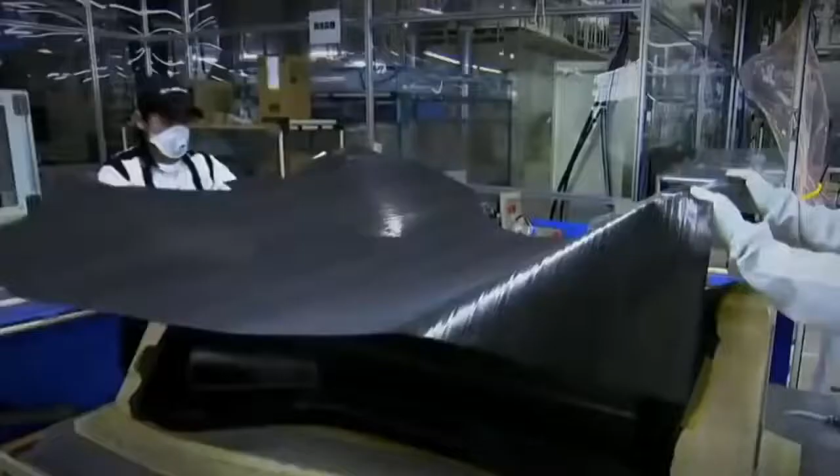A car like no other is taking shape. Craftsmen hand-build what they consider an automotive work of art. Money is no object. This machine must redefine a billion-dollar brand. Failure is not an option.

Japanese marque Lexus sells itself on luxury, marketing its cars as elegant, quiet, high-tech, and efficient. Now, a different kind of car wears the Lexus badge: the LFA. Aggressive, loud, agile, with the highest revving V10 engine in a production car, capable of 325 kilometers per hour. A car like nothing Lexus has ever produced before.

Lexus is just over 20 years old. The world's largest car maker, Toyota, created the brand to compete with other high-flying luxury marques like Mercedes-Benz, BMW, and Jaguar. It's worked. Lexus is now one of the biggest-selling high-end marques in the United States.

But now, Lexus is out to inject more excitement into their brand. Chief Engineer Tanahashi Haruhiko is the man behind this vision. The LFA has a passion, an emotion that isn't in earlier Lexus cars. We wanted to move the brand in that direction. That's how we made this car.

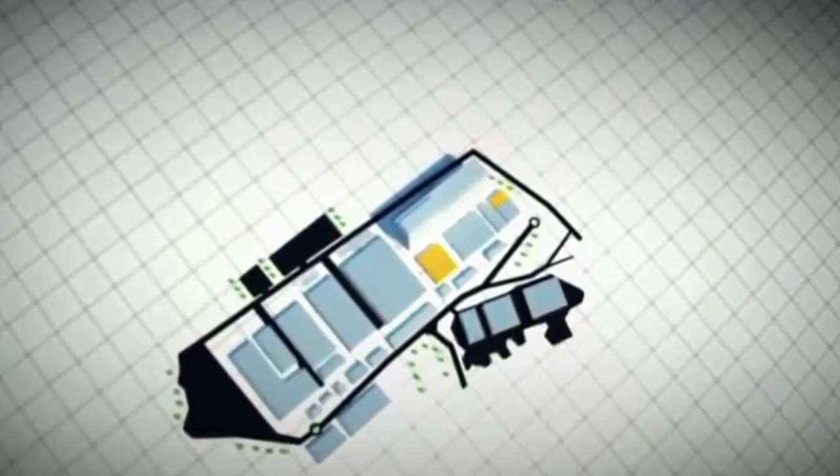Finding a factory in Japan isn't hard when you're part of the country's largest company. Toyota is so big, they even have their own city, Toyota City. Of the company's 15 Japanese factories, 10 are found in the city or close by, among them the Motomachi assembly plant. The company transformed two unassuming blocks of this megafactory to create the LFA. They then scoured Toyota's 50,000 Japanese workforce to handpick just 175.

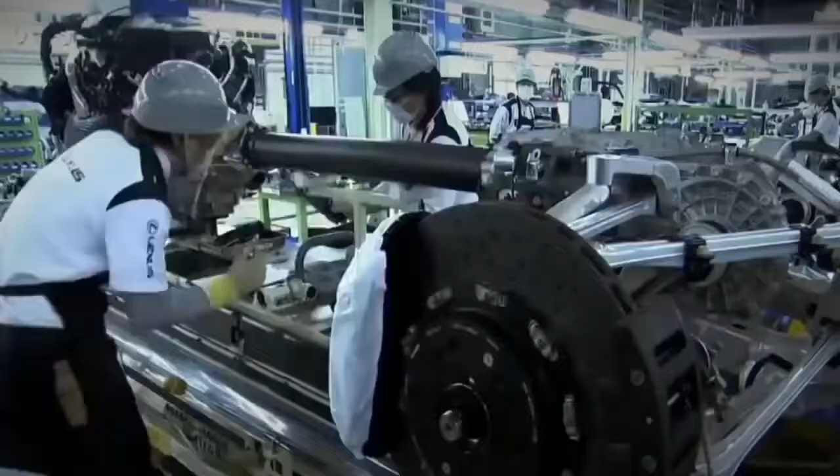All the associates here at the LFA Works feel they are artisans, not just operators. These artisans are known as takumi, Japanese for craftsmen, a status only conferred on the most highly trained, skilled workers. Each and every associate at the LFA Works is seeking to achieve perfection, taking this challenge on with a sort of samurai spirit.

Yamanaka Shigeru is manager of the LFA Works. His teamwork credentials come from another time-honored Japanese tradition: baseball. Before this, I was working as manager of the Toyota Motor Corporation baseball team, which brought people together from lots of different backgrounds. It was because I could manage that organization that I've been made manager here.

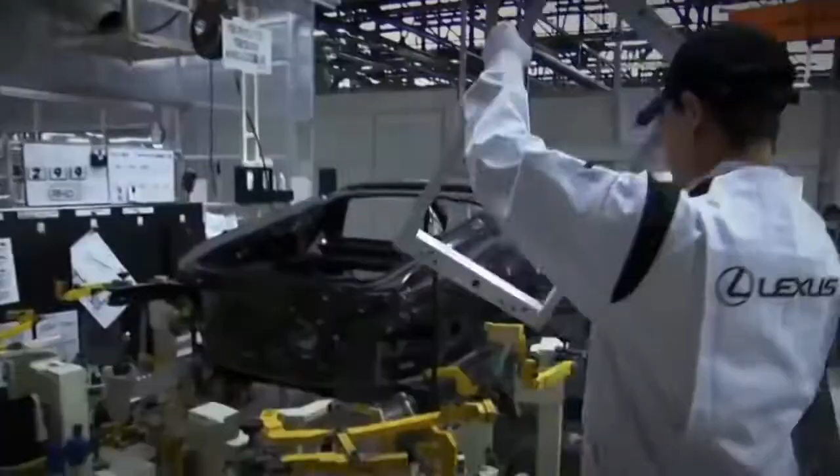To reach their goal, they're tight-knit, utilizing sophisticated tools and materials to build the car. The most important of these is carbon fiber composite. Carbon is crucial to the car's performance. It's a material 5 times the strength of steel, yet a quarter the weight. It's the construction material of choice for both Formula One racing cars and the aerospace industry.

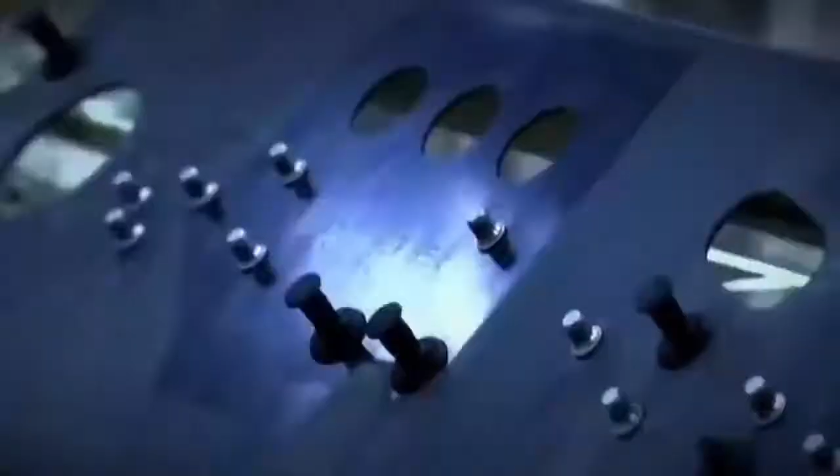The company even makes their own carbon fiber here on site. Up until now, no television cameras have ever been allowed inside this top-secret facility. First, simple strands of carbon fiber are woven into a pliable cloth using an automated weaving machine. This fabric is then transformed through heat, pressure, epoxy resin, and labor-intensive techniques into the car's core known as the tub. The tub is pieced together like a 3D jigsaw. It starts with the construction of the floor.

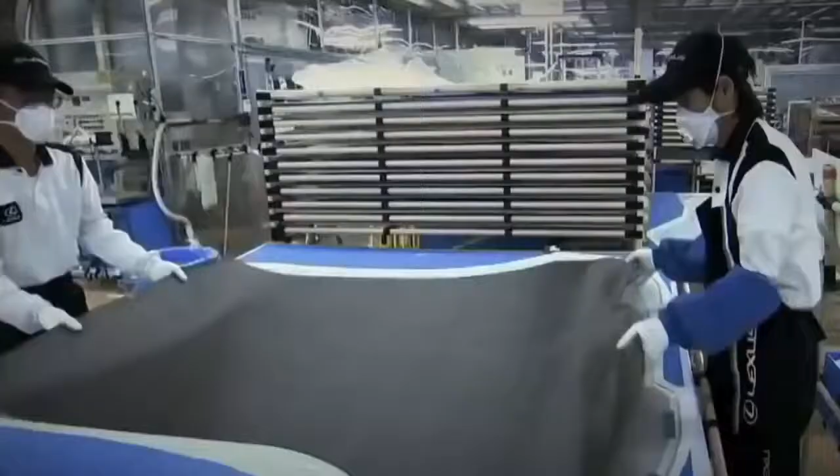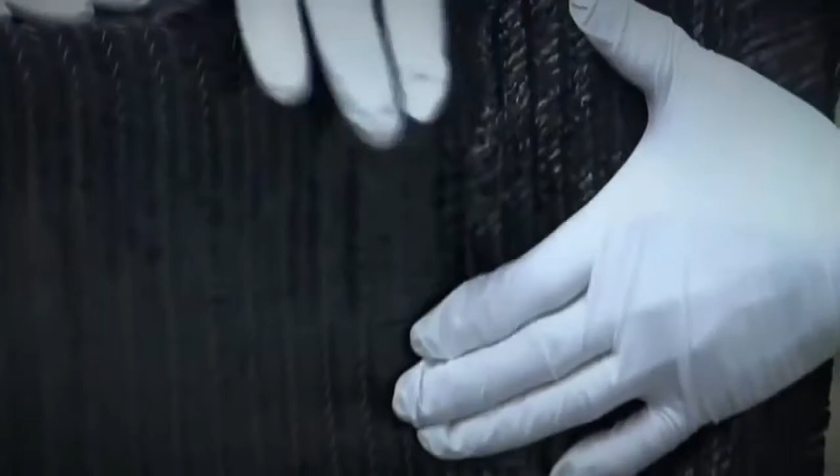To make it, precisely cut carbon fiber cloth is lifted onto a mold. Next, skilled takumi smooth the supple fabric over the mold. This one is for the transmission tunnel that will house the drive shaft and exhaust. In very complex areas like this, the fabric inevitably becomes frayed and not very neat. The associates work with these areas as if working with silk, taking great care every day. They also wear masks to avoid breathing in the hazardous fibers. In the beginning, the associates found it very difficult to work this material. It was much easier when they used an iron.

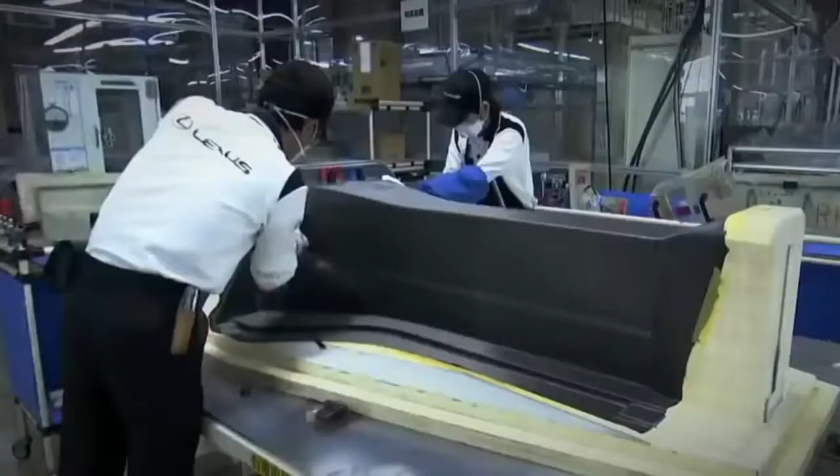The completed part is briefly heated to set its shape. It's then fitted into a template, along with 7 other floor parts, and inserted into a 1,000-ton press. A glue-like resin is pumped into the template, and the whole section is then baked for 8 hours at 130 degrees Celsius. Under this pressure and heat, the resin sets hard, binding the individual parts together to produce the car's floor panel.

Back in 2000, the concept of a world-beating supercar only existed in one man's head. At the company, I talked to just a small group of people at the top, not expecting anything, and they said, go ahead and try. With permission to proceed, Tanahashi gathers a team of engineers around him, and they start to make the basic engineering decisions. In the beginning, we planned to make the body from aluminium.

But Tanahashi is fascinated with the possibilities offered by carbon. Developing a supercar, a super sports car, carbon fiber was a material I really wanted to try using, if at all possible. But this wonder material has its drawbacks. It's expensive, and the company has never used it to build any of their cars before. Despite these significant challenges, Tanahashi gets his way.

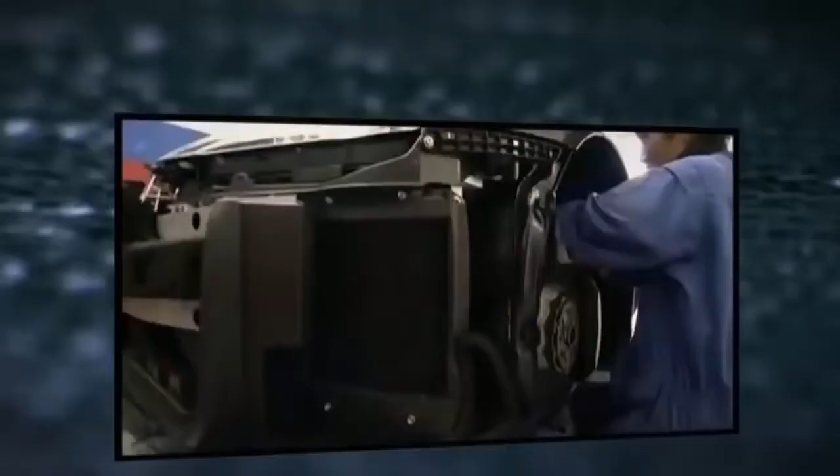In 2005, my boss said, why not go for carbon? Slapping me on the shoulder. And I made the decision to go for carbon then. It's a bold step. Everyone involved with this project must master a material they have no experience with at all.

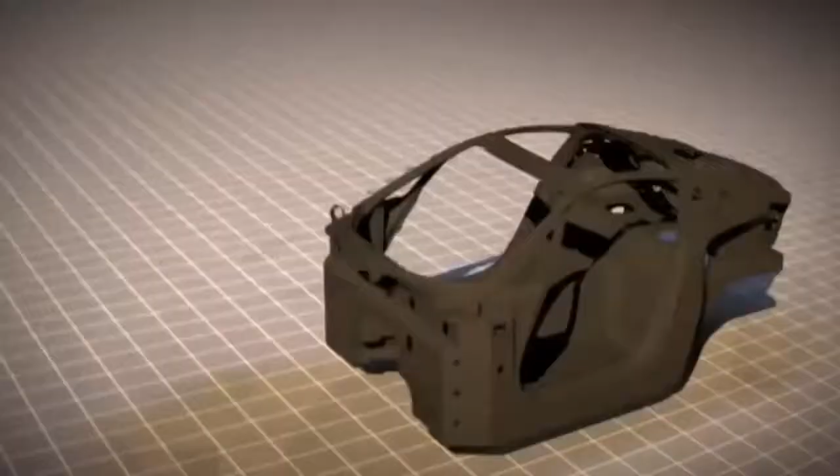It was the first time the workers had touched carbon, and everything about it was difficult for them. In the state-of-the-art carbon fiber facility, the Takumi are returning from lunch. They vacuum themselves down to remove any foreign particles before entering a highly confidential sealed room, where the majority of the tub's central frame is created using the most intricate techniques.

In this process, an automated laser cuts out hundreds of individual shapes from carbon fiber cloth that's been pre-impregnated with a sticky resin.

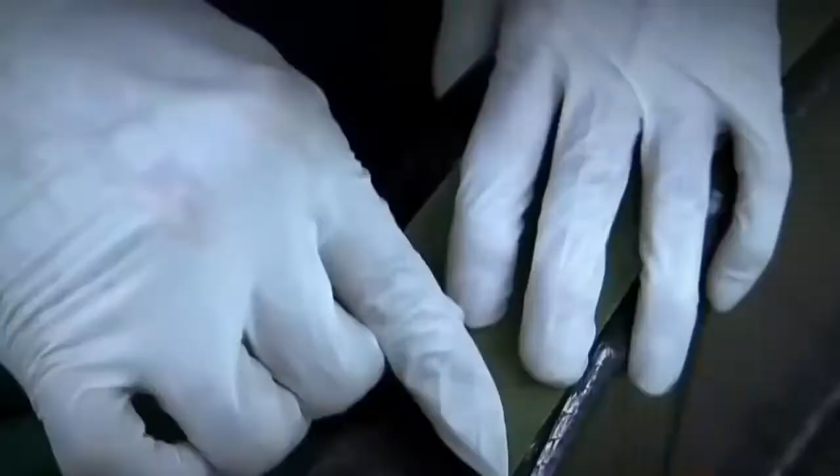Next, Takumi layer the cutouts, up to 20 sheets deep, onto a mold. This one will make the right side panel. The associate uses a dryer to raise the temperature of the laminate and half melts the resin as he applies it. The tacky cutouts stick to each other and any gaps are squeezed out using a vacuum bag that forces them together.

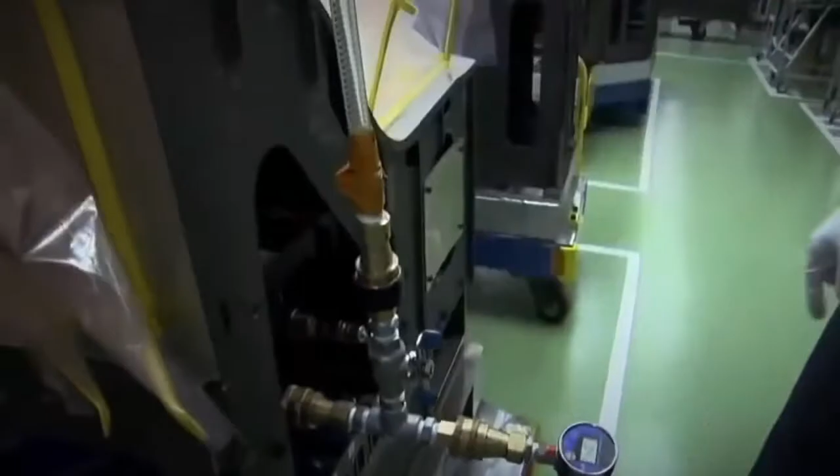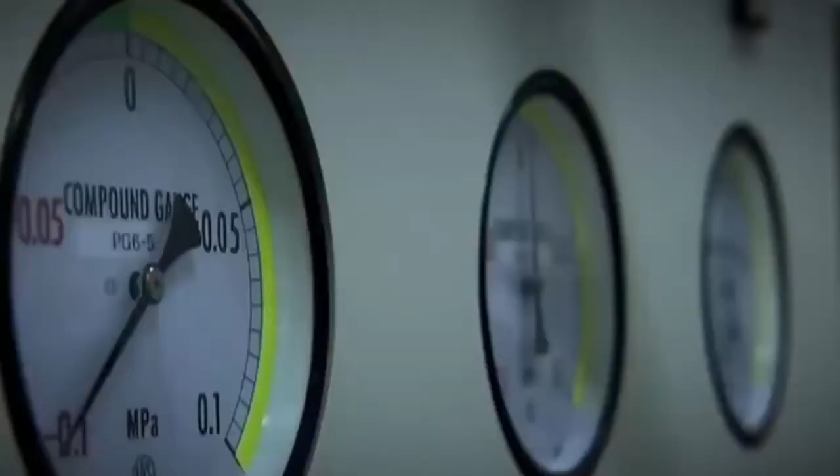The shrink-wrapped side panel is then wheeled across the works and loaded into a pressurized oven. Baking overnight at 150 degrees Celsius sets the resin, resulting in a side panel that's both ultra-strong and ultra-light. An aluminium equivalent would be twice as heavy.

Weight saving is the holy grail for all auto engineers. Less weight and more power leads to increased acceleration, and speed defines a supercar. The body of the LFA is 65% carbon fiber, helping it accelerate from 0 to 100 kilometers per hour in 3.7 seconds. If made of aluminium, it would be 100 kilograms heavier, like having a sumo wrestler in the passenger seat. As it is, this car weighs just 1,400 kilograms all in.

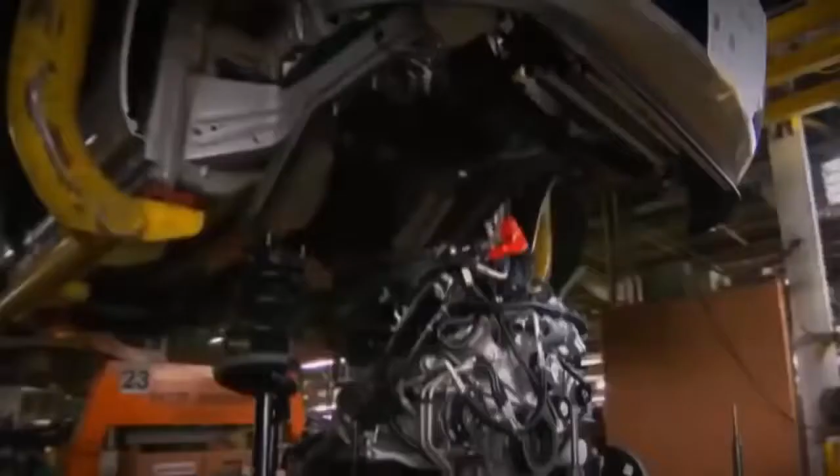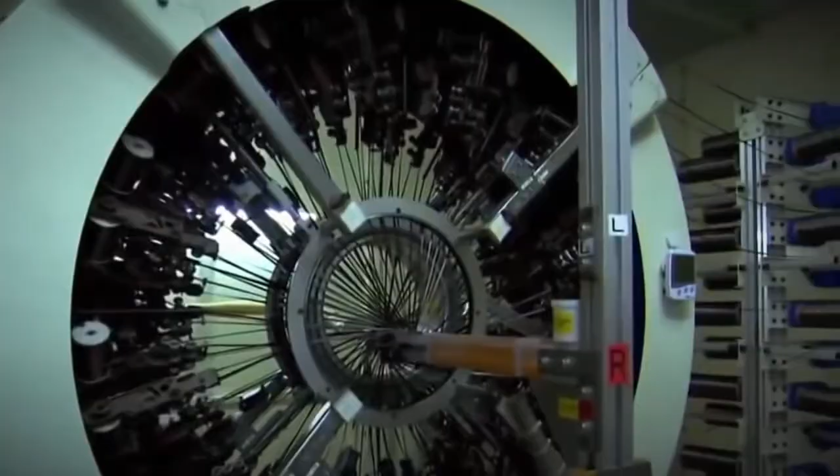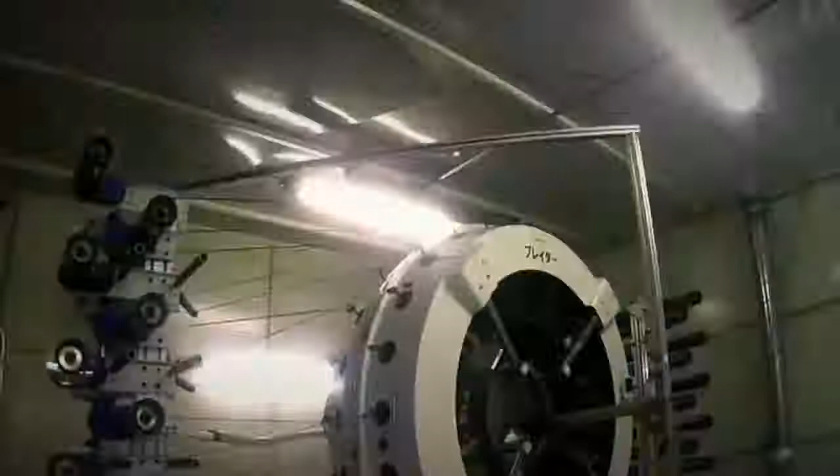Back at the factory, in a locked room, a bespoke machine creates two crucial parts to complete the tub's construction. The roof rails support the windscreen, as well as protecting the driver if the car rolls over. This custom-built circular loom weaves the carbon rail in 3D. It uses lasers to control the feed of carbon fiber strands onto 144 bobbins. These knit the carbon around a top-secret automated template that's fed through the center of the loom. This is done twice over to cross-thatch the carbon weave, so giving the rail its strength.

The whole mechanism has its own control box, and for good reason. If something goes wrong, even a little thing, the shape gets distorted immediately, so the operator constantly pays attention to avoid this. The roof rail is heated and impregnated with more resin to complete its metamorphosis from a flexible tube to a rock-hard rail. You may think that this is quite heavy, but it is only 2 kilograms.

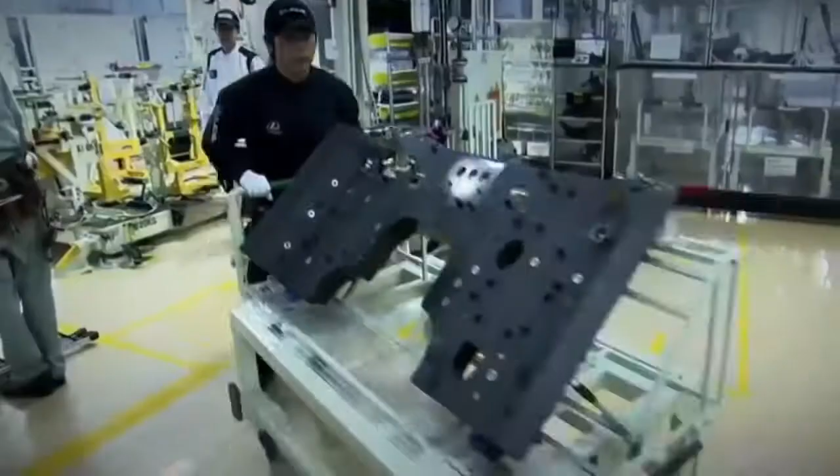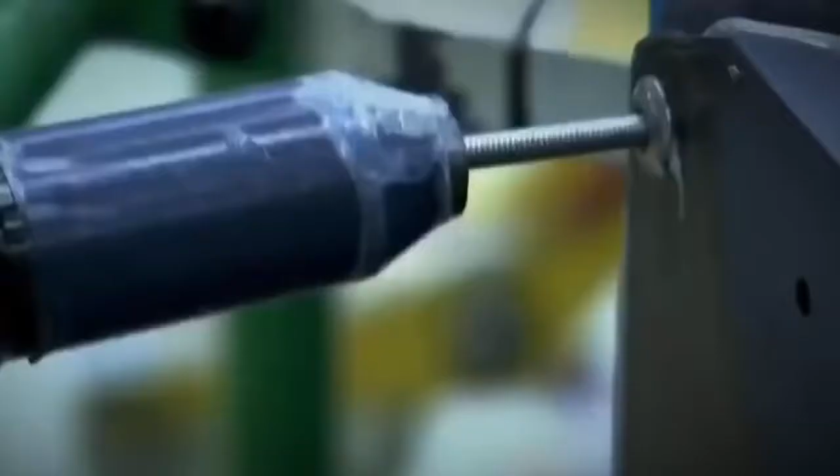The tub is bonded in another top-secret jig. First, a super-strong adhesive, known as epoxy resin, is applied by robot and hand to each of the parts. The separate parts are transferred to the jig and locked in place. Pop rivets keep the pieces aligned. To cure the epoxy, the jig is pushed into an oven and then baked for 60 minutes at 60 degrees Celsius.

The resulting tub is so strong, it acts as both the structural core of the car and as a crush-resistant safety cell, should the car crash.

The challenge now is for Matsumoto Kengo, chief designer of the LFA, to create a car with a body as technical as it is elegant. For us, aerodynamics, heat and airflow management should be tangible in the design.

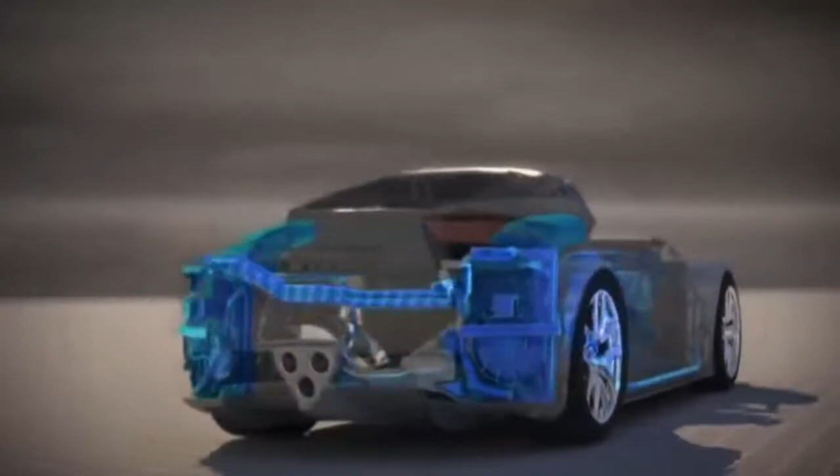A conventional car cools its engine with forward-mounted radiators that suck cold air through a front grille. Not the LFA. Front space is at a premium, so coolant is pumped from the hot engine to twin radiators mounted behind the car's rear wheels. Matsumoto had to shape the car to funnel cold air to these vital components.

Airflow management is optimally controlled by setting the angle between the door mirror and the cabin. It goes past the cabin and smoothly into the air intake for the rear radiator. This shape is not just for styling. The intake is deliberately formed here, from the base of the glass. The result is an airflow system capable of cooling the engine even under the most extreme race conditions.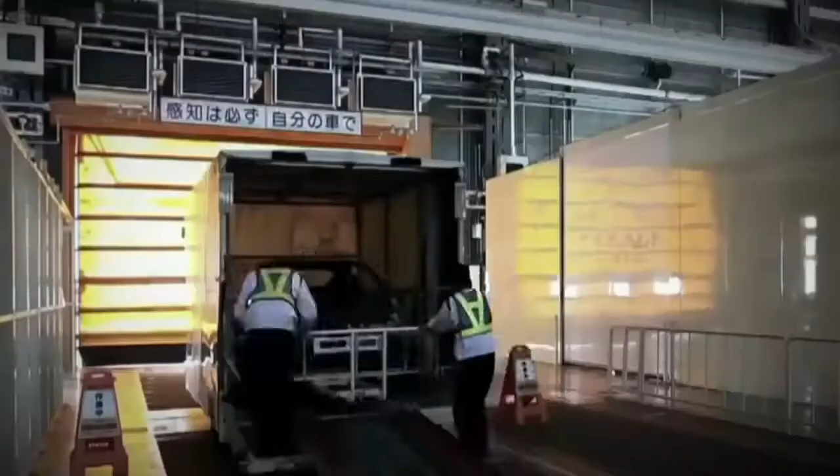It's 8:45 in the morning at the LFA works. The Takumi are warming up for an 8-hour shift ahead. Their first task is to greet the bare cabin as it arrives from its 15-day build in carbon round the corner. In assembly, the cabin will progress through 4 positions: trim, chassis, final, and alignment.

15,000 parts go into making an LFA. The first of these are attached here in trim.

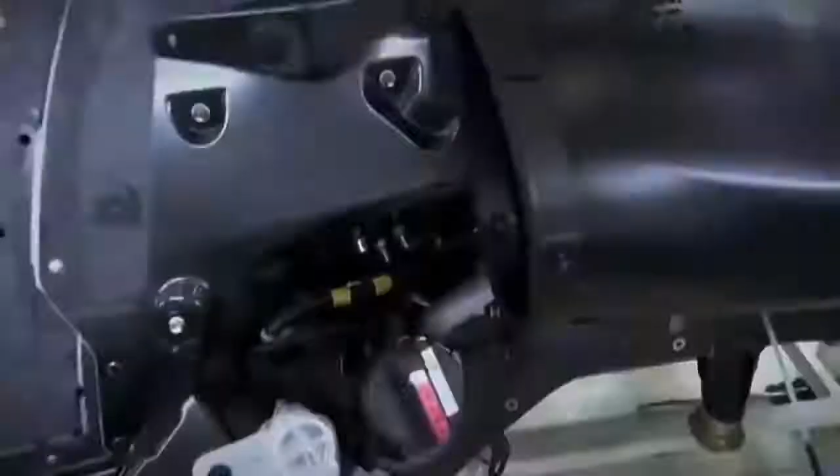Just meters away, other Takumi assemble the drivetrain and suspension. The drivetrain comprises the transmission, torque tube, and last but not least, a 4.8-litre V10.

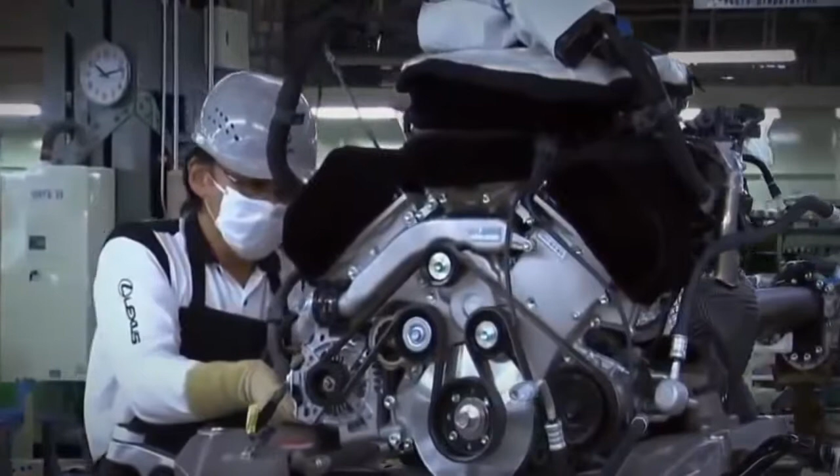The location of this engine is crucial to the car's entire concept. I wanted to build the car around the people in it. And for a supercar that puts people first, the optimum place for the engine is front mid. This location puts the engine between the driver and the car's front wheels, with the transmission placed at the rear, so the driver is in the center and the car feels balanced to drive.

The aim is to make the car's handling as good as possible. But a front mid configuration dramatically restricts the space available for the engine. Tanahashi has a problem.

You need an engine of a certain size with a certain degree of compactness, but you want a high-powered engine as well. Tanahashi needs a small engine to fit in the restricted engine space, but he also needs the power of a large engine, because power equals speed.

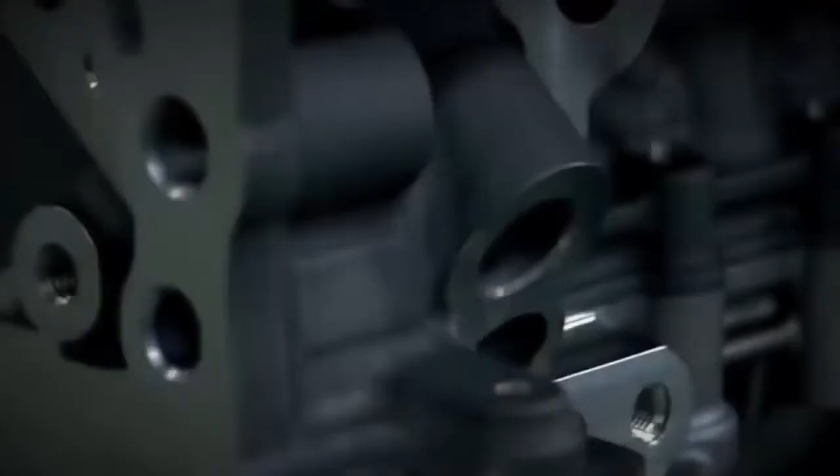And that isn't all. The high-pitched sound of Formula One makes you shiver, doesn't it? I really wanted to have that as part of the LFA. Only a high-revving V10 engine supplies this combination of power and sound, but a traditional V10 is too big for

his mid-front configuration. Lexus have made nothing like this before. Their production line cars use 6- and 8-cylinder engines engineered for a super quiet ride. This V10 will be the opposite.

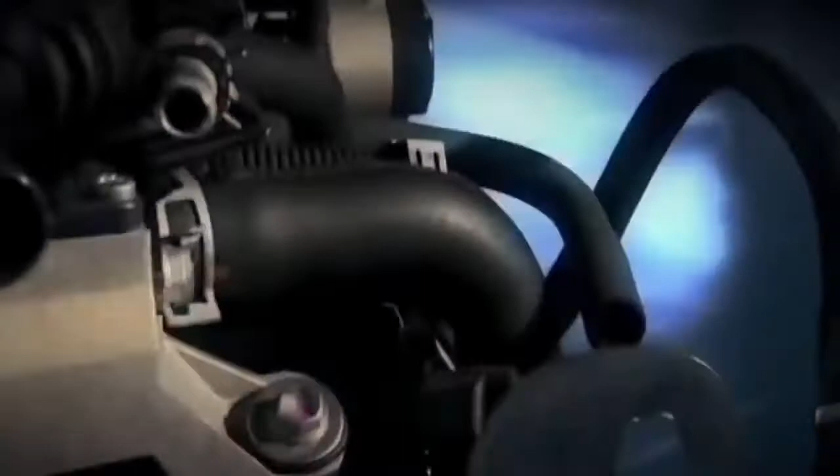Tanahashi turns to some old friends for help. We are a motorcycle manufacturer. We understand power alone is not enough in a vehicle. For a sports car, small and lightweight is critical.

For almost half a century, Yamaha have worked with Toyota to create high-powered lightweight engines and cars. The legendary 2000 GT, star of the James Bond film You Only Live Twice, and Japan's first true sports car, was the first fruit of their collaboration.

Headed by Lexus engine guru Okamoto Takamitsu, the team sets itself an ambitious goal: to create a naturally aspirated V10 engine as compact as a traditional Lexus V8, with the weight of a V6. I wanted to create something different to any other supercar engine.

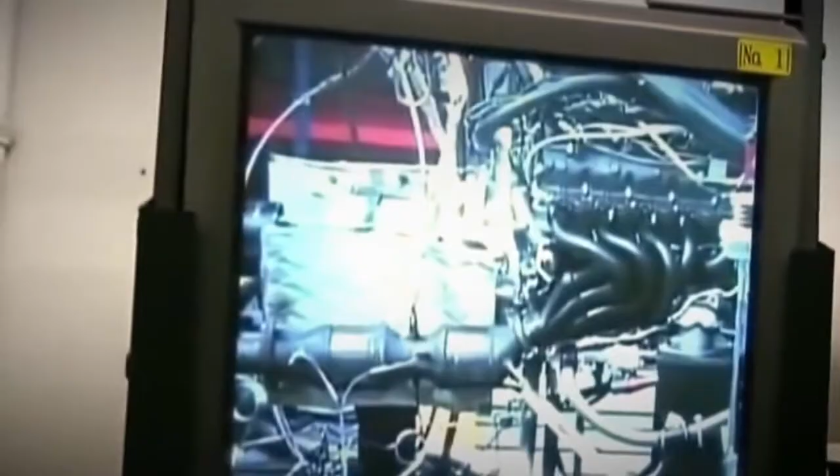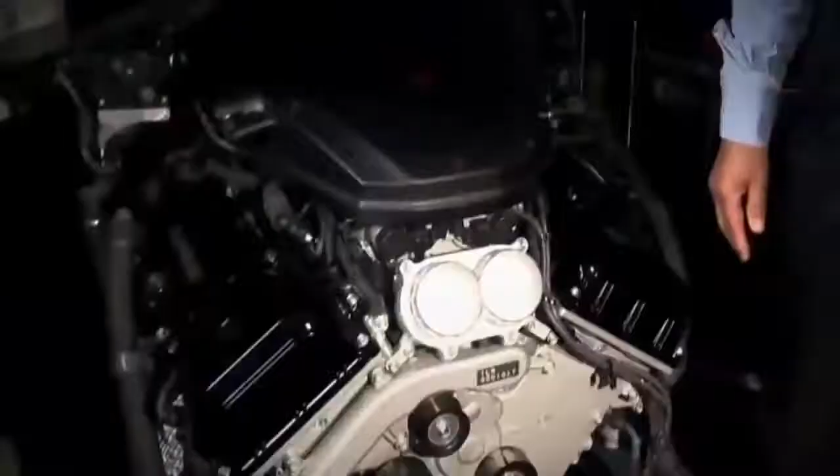Normally, engineers use turbochargers to boost the output of smaller engines to simulate V10 power. But turbocharged engines don't have the rapid response, acceleration or sound of a naturally aspirated V10. By using Yamaha's motorcycle know-how, the lightest metals, and redesigning the engine's guts, Okamoto creates a masterpiece of engineering: a non-turbocharged compact V10 that fits into a mid-front design while keeping weight to a minimum.

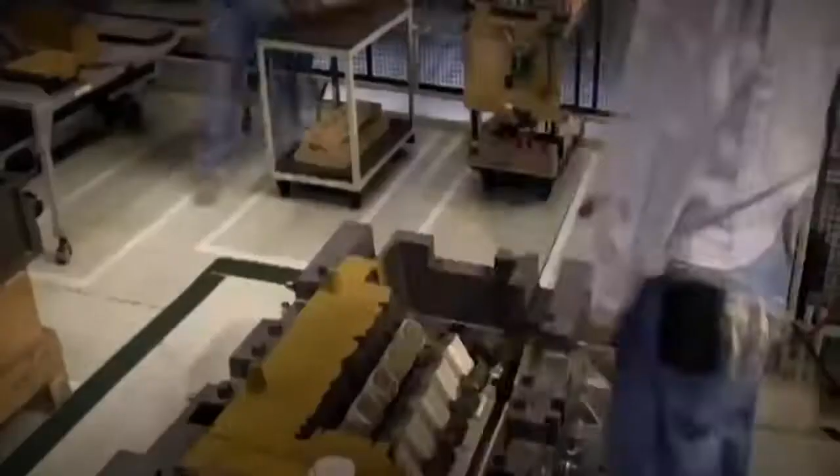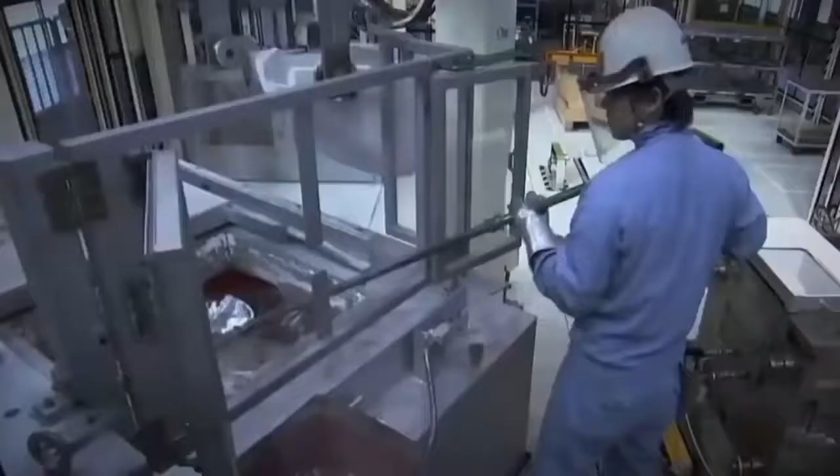The engine starts life in Toyota's Miyoshi plant as molten aluminium. It's cast in a 3D resin-impregnated sand mold made from 37 individual blocks that take a week to fashion. With the blocks fitted together, the mold is ready to be filled. At 750 degrees Celsius, impurities are scooped off the top of the molten aluminium. The liquid metal flows into the mold as a vacuum sucks out any contaminating gases.

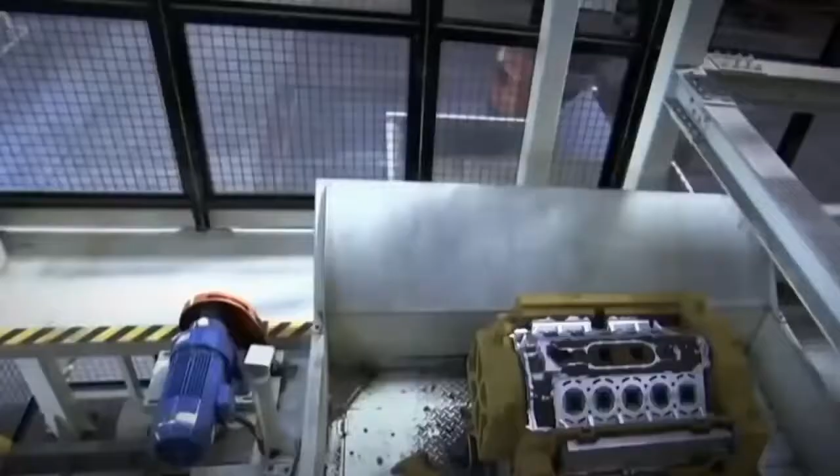Two hours later, with the metal set, the sand is hammered off to reveal the solid aluminium engine block inside. It's off to Toyota City's Honsha factory and the company's highly confidential Formula One facility. But without a win in 139 races, they withdrew in 2009, leaving this state-of-the-art facility idle.

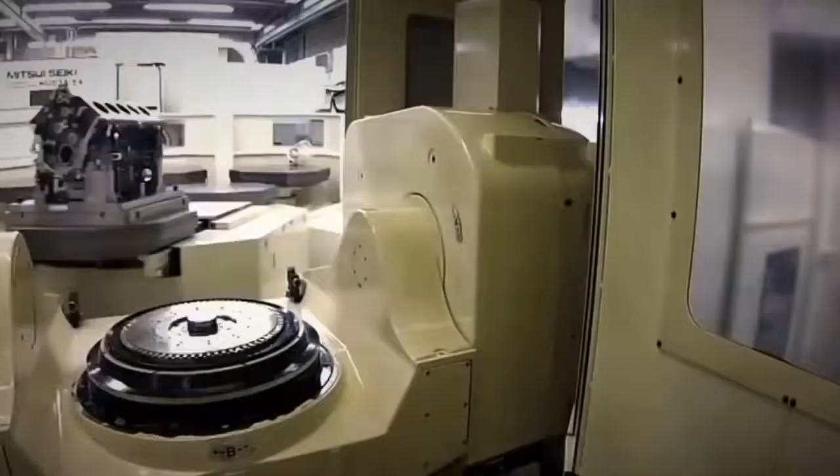For the LFA team, it was too good an opportunity to miss. The close parallels with F1 engine technology make this milling facility a ready-made fit. In these million-dollar automated machining tools, the rough engine casts are milled, drilled and polished before emerging as precisely spec'd engine blocks.

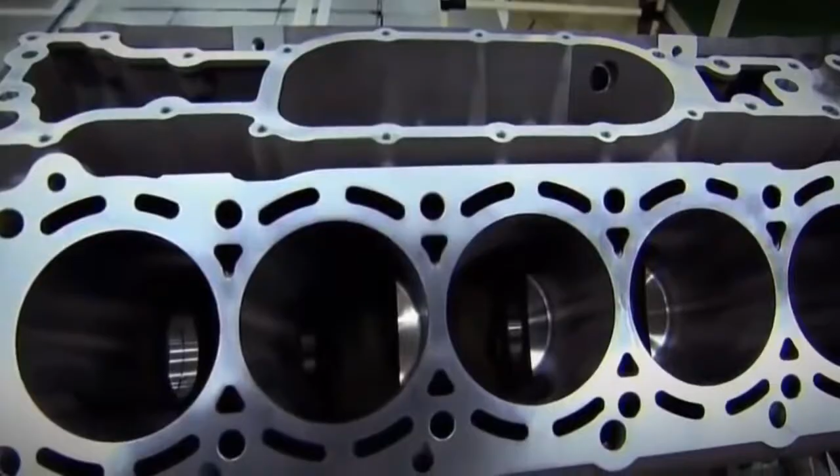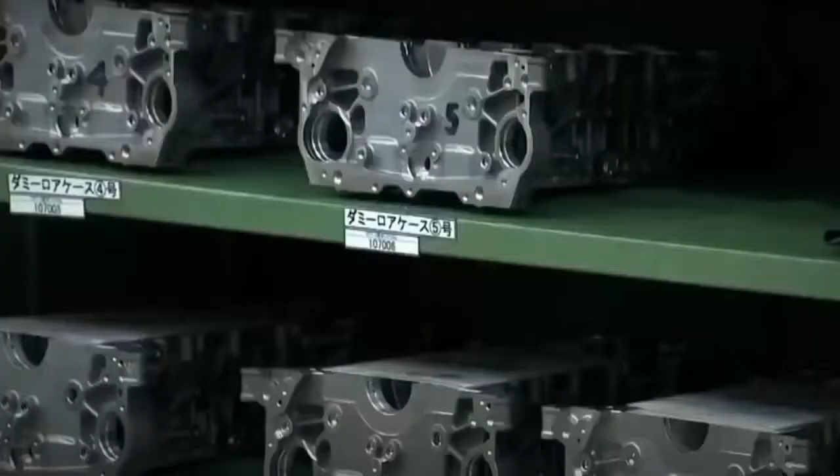Then the robots hand over to humans. In a sealed room, Takumi hone every sharp edge using precision polishing tools. Finally, a highly skilled Takumi pre-assembles the finished engine blocks to check they fit precisely. These blocks and screws are paired for life.

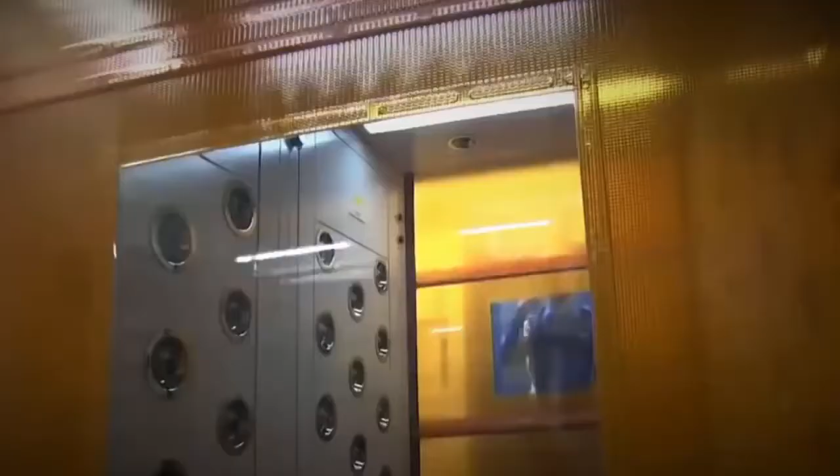Disassembled, they travel as a unit to Yamaha's Iwata City plant, 90 kilometers southeast of Toyota City. The engine room here takes obsession to new heights. As you'd expect, hairnets and airlocks prevent any particle contamination.

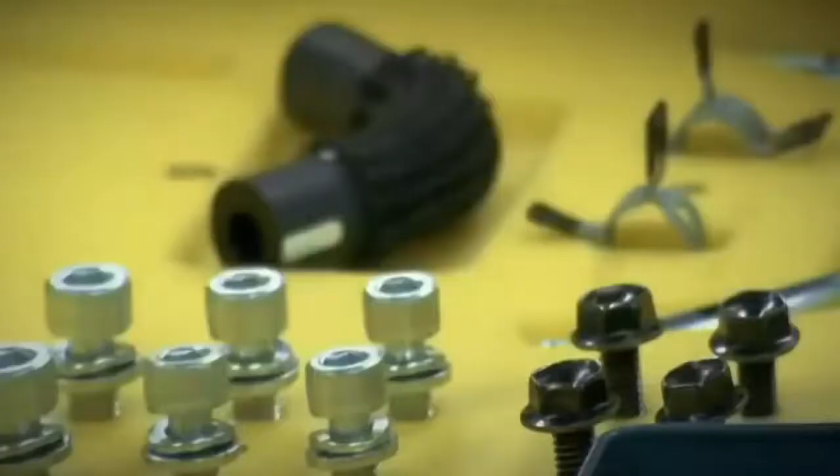But the room is also kept at a constant temperature and humidity to ensure that every engine part is at the same state of thermal expansion during assembly. This is more laboratory than workshop. The 2,200 engine parts are divided into 61 different kits for assembly by number.

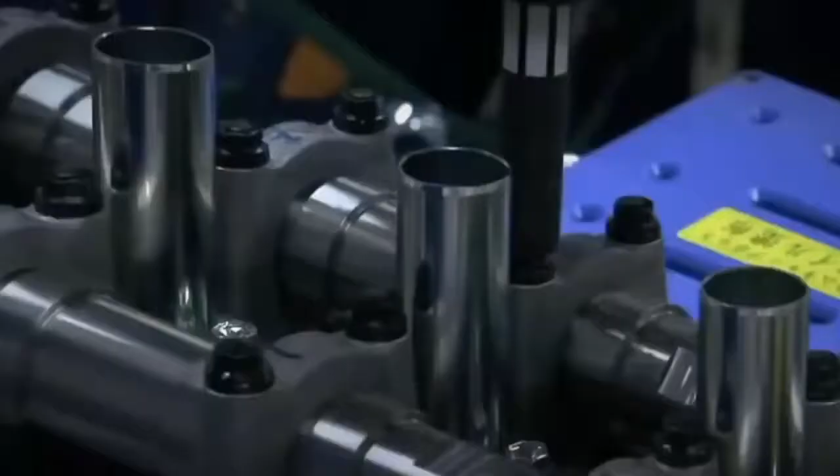4 highly trained Takumi work here. Each is responsible for a single engine from start to finish. To avoid any mistakes, they follow a series of on-screen instructions. It takes 2.5 days to complete the build of one engine.

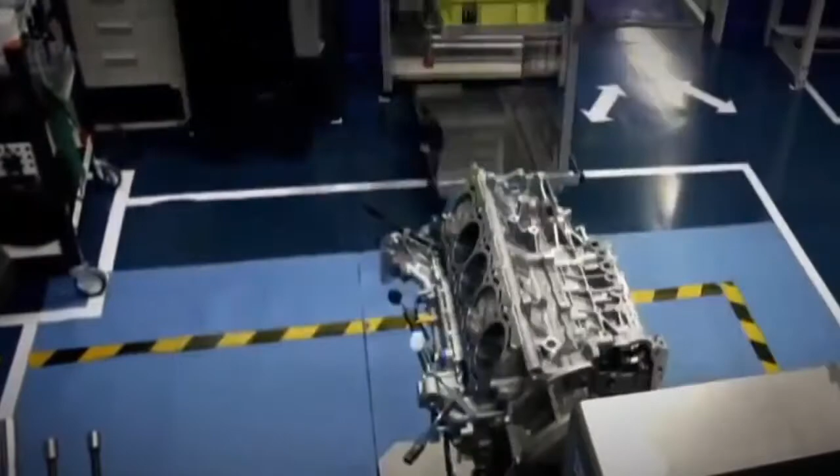Each hand-assembled engine bears the Takumi signature. Before this masterpiece goes anywhere near a car, it undergoes a half-day of exhaustive testing in the room next door to engine assembly. The resulting 4.8-litre engine is so responsive that it takes just 0.6 seconds to reach 9,000 RPM.

That means instant acceleration, whatever gear you're in. This engine has excellent response and more RPM than any other commercially available engine. Response time is so fast that a digital rev counter is the only unit able to keep up.

And the sound of this high-revving engine is unmistakable. The sound of the LFA is unique, and once heard, never forgotten. To achieve the engine soundtrack that Tanahashi insists upon requires more of Yamaha's specialist knowledge.

We are a manufacturer of musical instruments, so when it comes to sound technology, we have a certain level of know-how.

Honji Yoshikazu is obsessed with sound. I think the relationship between a super sports car and its driver is like the relationship between a top musical performer and their instrument. When they play in a certain way, they can listen to that sound and use it to produce another, better sound.

Typically, a car has two different sound characteristics. One sound is the exhaust. You can call it an iconic sound - just by hearing it, you know which car it is. The other, which we were particularly concerned with, is the sound heard by the driver.

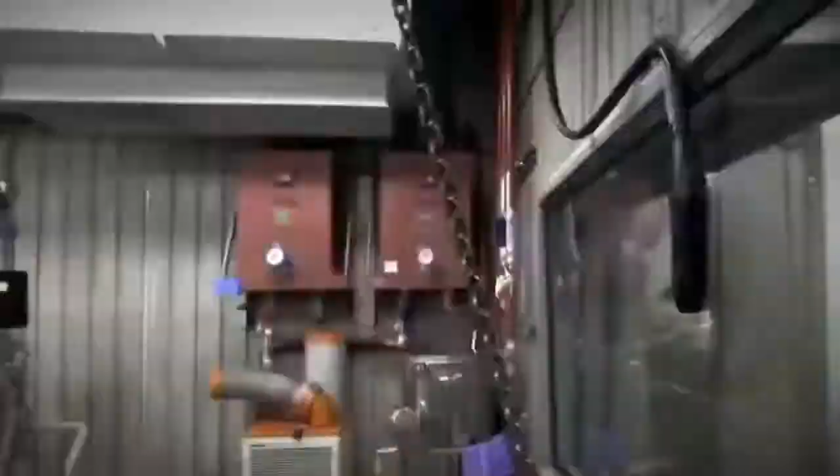To refine the driver's soundtrack, Heiji Maruyama, general manager of Yamaha Motors, had to redesign the component that sits on top of the engine, called the surge tank, by turning convention on its head. The function of the surge tank is to send air equally into all 10 cylinders.

Normally, techniques to reduce noise from the intakes are used. We thought to go the other way and use it to amplify the sound, to communicate it to the driver. Maruyama tunes the chamber by varying the thickness of the surge tank's upper surface and adding internal vibrating ribs.

The construction is very like that of an acoustic guitar or violin. The team channeled these good vibrations back into the cabin using sound passages. We use these to send low-pitch sound to the driver's feet and higher frequency sounds through at ear level. The driver is in the middle of this dynamic surround sound system.

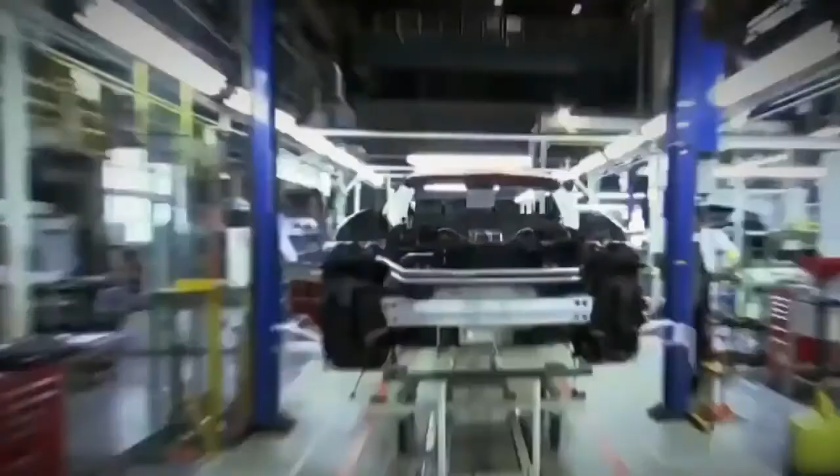The completed engine is forklifted onto a waiting truck for shipment back to the LFA works. Here, as part of the assembled drivetrain, it's inserted into the cabin's belly, guided only by eye.

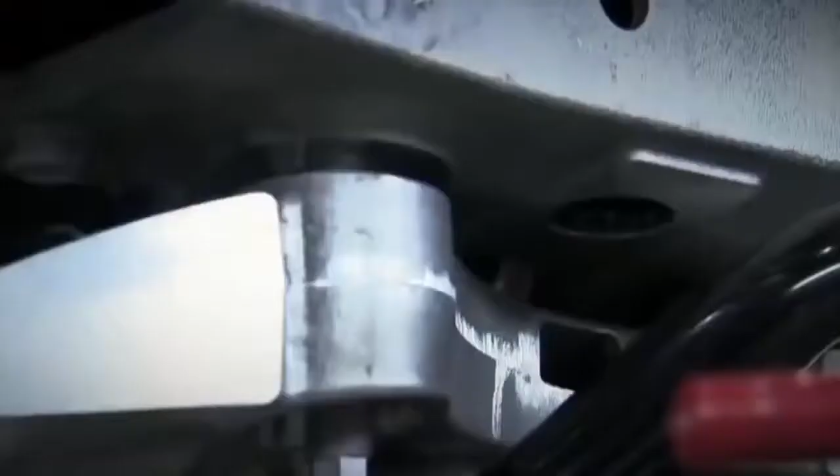With the guts of the car in place, it's time to feed them. An automated pump injects engine oil, brake fluid and coolant into the appropriate underbonnet opening.

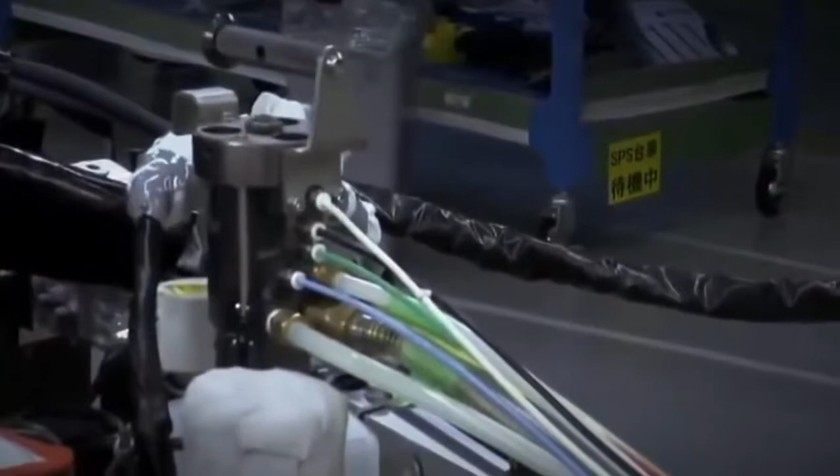In Japan, machines play a tune to alert anybody nearby that they're running. This one plays an American folk song. With the precise volume of fluid added, the pump stops, as does the music.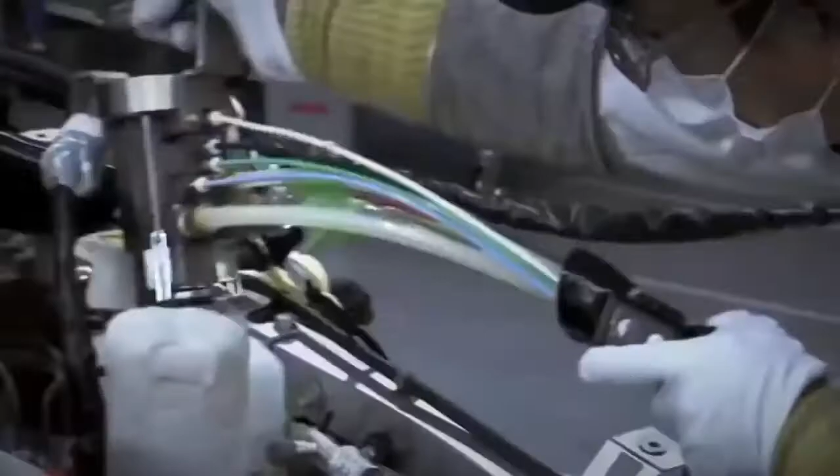The car's 9 moulded glass fibre body panels are manufactured off-site. This material is both strong and light, but far cheaper to replace than carbon fibre, should the car crash.

The paint shop is under the same roof as assembly, but it's a very different world in here. At the LFA works, paint is one of the few production processes performed by robot. The company believes they give a more consistent finish.

But there's always an ongoing human battle in the paint department. Dust is the greatest enemy for painting. If dust gets into the paint surface, when it's heated, the dust swells up and causes a blister. So the atmosphere is controlled on a daily basis, and there's a strict dress code.

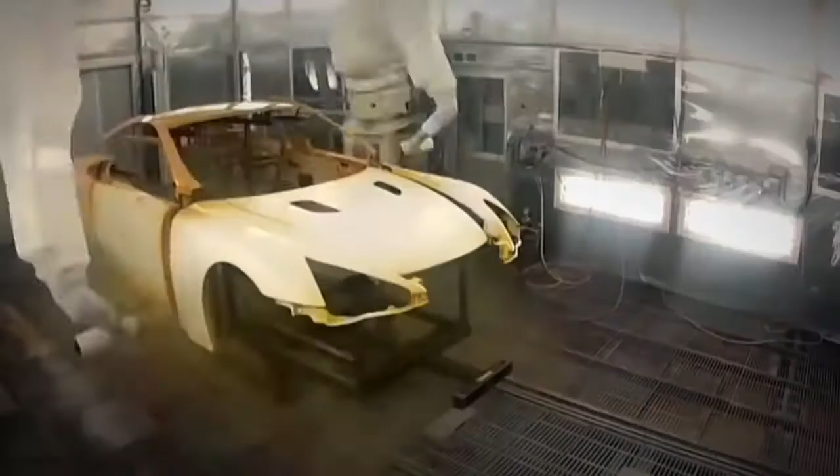Up to 5 layers of paint are applied. And where robots can't reach, humans can.

Job done. The sprayed panels are dried in an oven at 100 degrees Celsius for 50 minutes before being wheeled out for inspection.

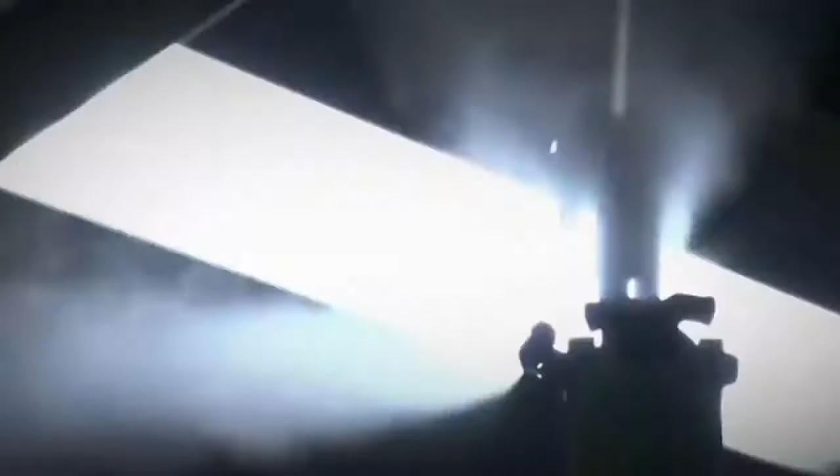The battle against dust continues, with water nozzles spraying a fine mist into the air to stop anything drifting onto the pristine surfaces. A bright light inspector spots any blemishes and marks them up to be polished out.

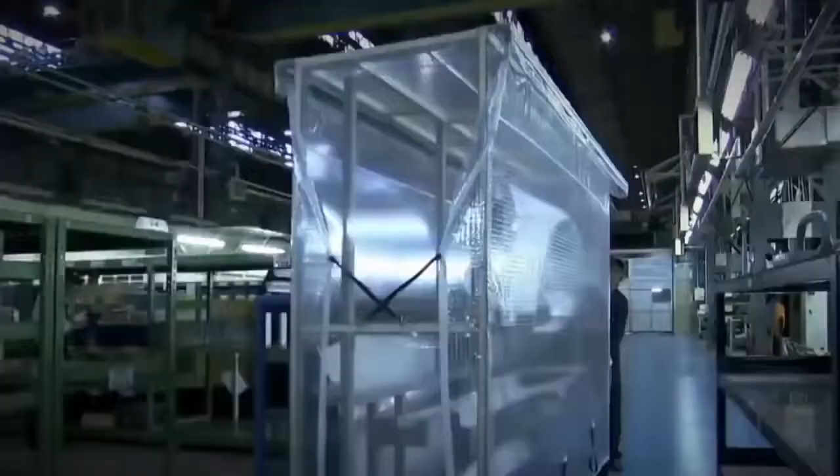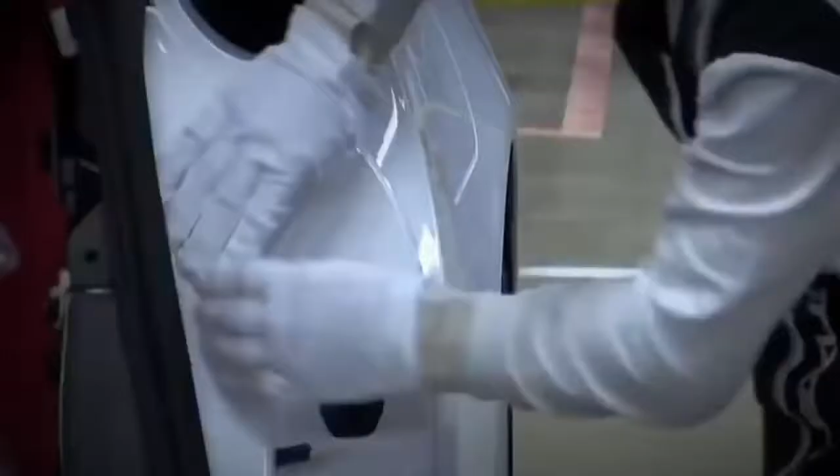The completed panels are wheeled out of paint across the factory floor and attached to the carbon tub back in assembly at the third position on the line, known as final. Here, the hand-stitched leather interior is installed, and the forged aluminium wheels with bespoke Bridgestone tyres are also fitted.

It looks as if the associates are performing each task very slowly, but every one of them is working very carefully and with a high degree of certainty. If you compare it to a sport, they are top players who complete a successful play every time.

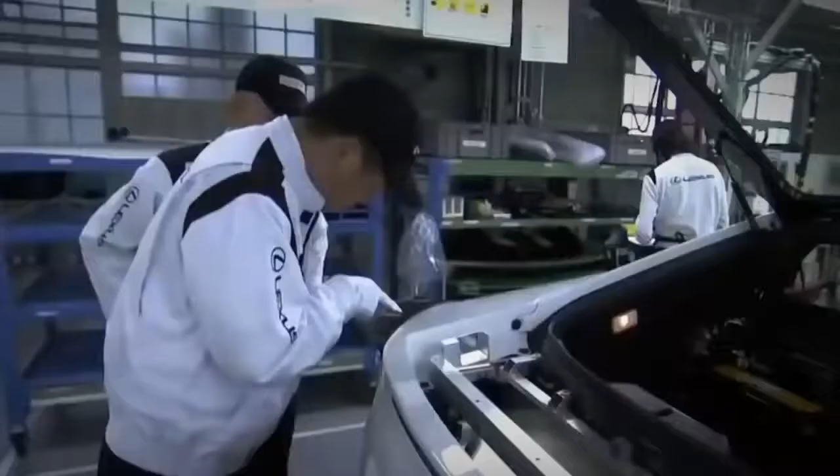The LFA works runs like clockwork, yet there's no clock watching. The reason why there is so much time is that Chief Yamanaka tells us to take our time and work slowly, so that we can make something that we know is good. He says that in order to ensure quality, we can take as much time as we need. That goes for overtime as well - if it means we make something good, then we can do overtime.

The only stipulation is that one car must drive off this assembly line every day. And from the beginning, Chief Engineer Tanahashi was clear that only 500 would be built. At a car a day, that will take just 2 years. And then, this factory will close.

Making only 500 cars positions the LFA as a very special car. There is no plan to make any more at all.

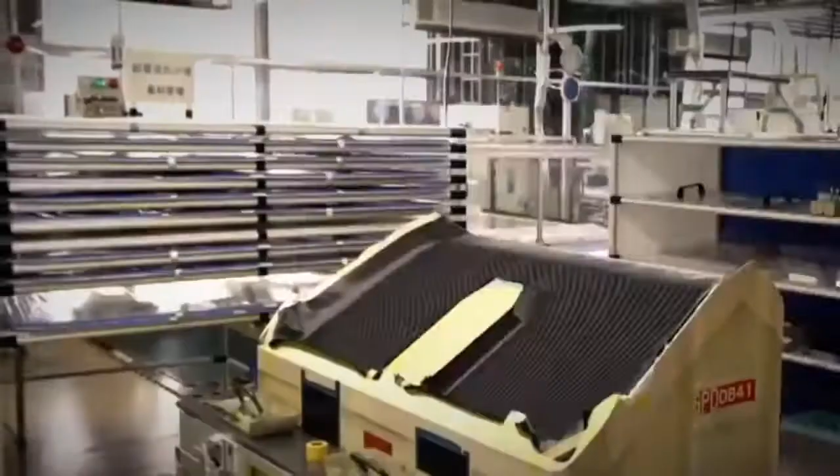Even pricing the LFA at $375,000, the most expensive Japanese road car ever, a limited production run isn't going to recoup the costs of development, the use of cutting-edge materials, and unlimited overtime.

I think it will be difficult to make a profit with only 500 units delivered. But by producing the LFA, the Lexus brand gains in value and is well received worldwide.

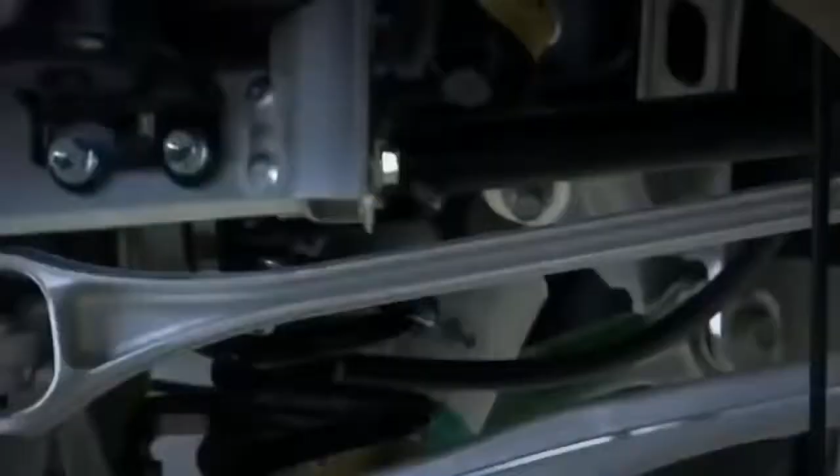I think the legacy will be left in technique, knowledge and teamwork for making cars that will please our customers in the future.

Back in 2004, with the prototype built, Chief Engineer Tanahashi takes a bold decision. He wants the car proved on the severest of tracks. Nothing in Japan fits the bill. So he takes the entire development team to the notorious Nürburgring in Germany.

For us car makers, the Nordschleife on the Nürburgring is like a mecca for cars. This is where this car was honed. The 20-kilometer Nordschleife section of the Nürburgring is infamous as the world's most punishing test track. For 4 years, the team tests every aspect of the car's engineering around the Nordschleife's dips, jumps, relentless corners, and flat-out straights.

The car's development makes progress towards its production deadline, but Tanahashi wants to fast-track its fine-tuning. In 2008, he throws it into the unforgiving world of racing and enters the Nürburgring 24-hour race. It was purely to get more feedback on the production type LFA and to improve it under real race conditions.

The brutal experiment works. A year later, the revised car wins its class. Tanahashi is finally happy, and in 2010, the LFA goes into full production. And when in 2011, a special race edition of the standard LFA is launched, its name pays homage to the racetrack that forged it. It is with thanks to that sacred place that we called it the Nürburgring package.

This Nürburgring package has a retuned engine which pumps out 571 horsepower, 11 more than the standard engine. This extra power requires more downforce to keep the car on the track, so the rear spoiler is larger and fixed.

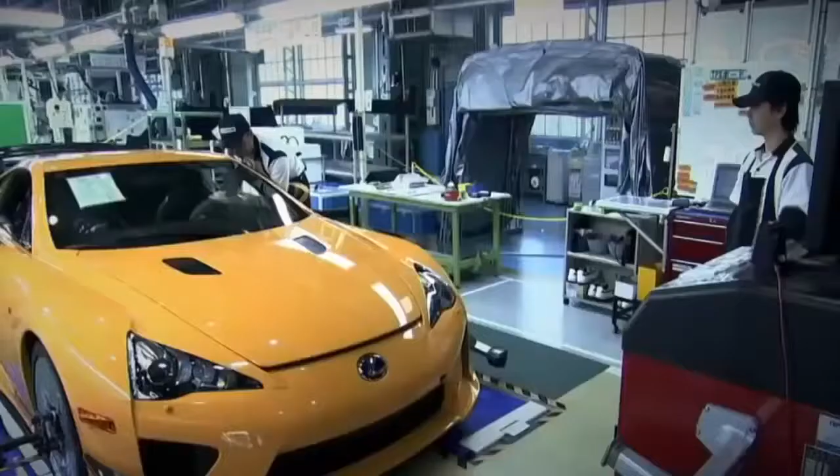Back at the LFA works, in assembly's last position, the wheels are aligned to ensure the car handles perfectly. After 3 days in assembly, the car officially moves to inspection.

The inspection process involves 7,000 separate checks. Hayashi Katsumi does the first of 1,482 of these under lights. Right now, I'm inspecting the paint surface. I'm using my hands to feel for any uneven areas in the bodywork.

You have to touch it gently, like I'd touch a woman. I've been doing this job for 30 years. If I didn't have my wife, then it would certainly be my lover.

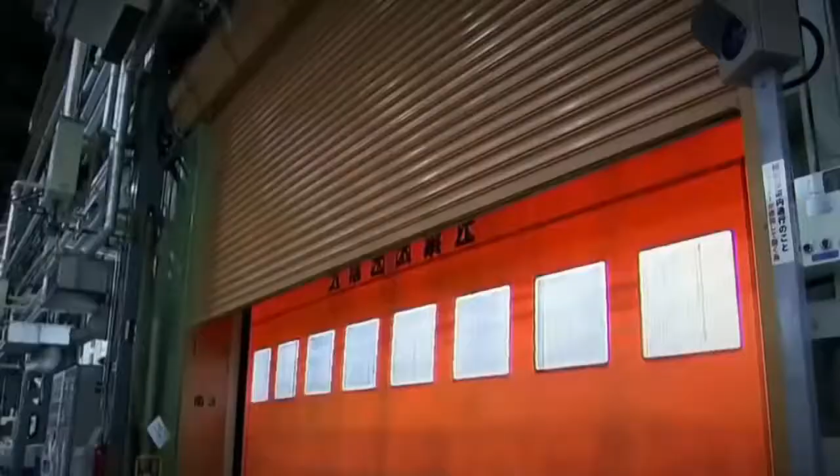With the internal and external surface inspection signed off, the car leaves the LFA works for good. It's driven through the Motomachi plant into quality control. This will be its home for the next 7 days.

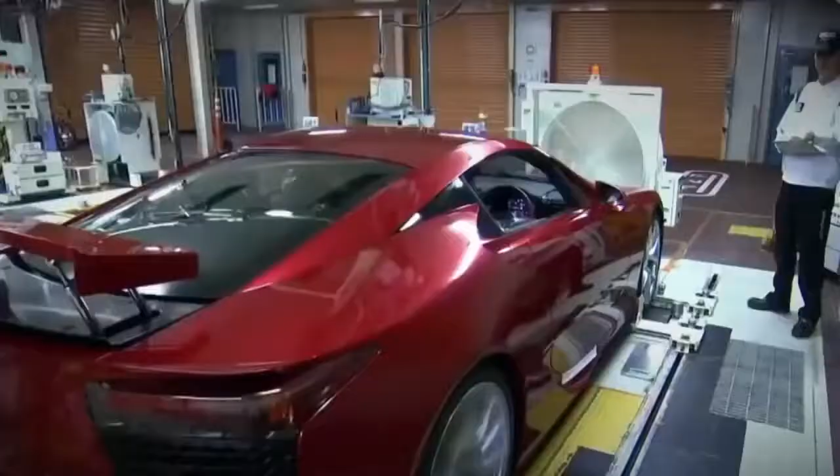The checks performed here range from speedometer and brake tests to water tightness. The reports fill a 350-page booklet.

Finally, test driver Amano Nobuaki ensures each of these cars is road ready when it leaves the factory. The car is bedded in on Motomachi's very own test track. The masked sections of the bodywork are to protect vulnerable areas from stone chips.

I think this is the best possible job in the world. Amano checks the car's controllability, engine sound, power, braking performance, and vibration noise on the 1 kilometer track.

There is one danger driving this car every day. Every now and again, I just want to forget the job and drive this car away somewhere to have for myself.

This car is complete and ready for its owner. To date, all 500 LFAs are spoken for. No more will be sold. The Lexus brand is safe, but Tanahashi still has something more to prove.